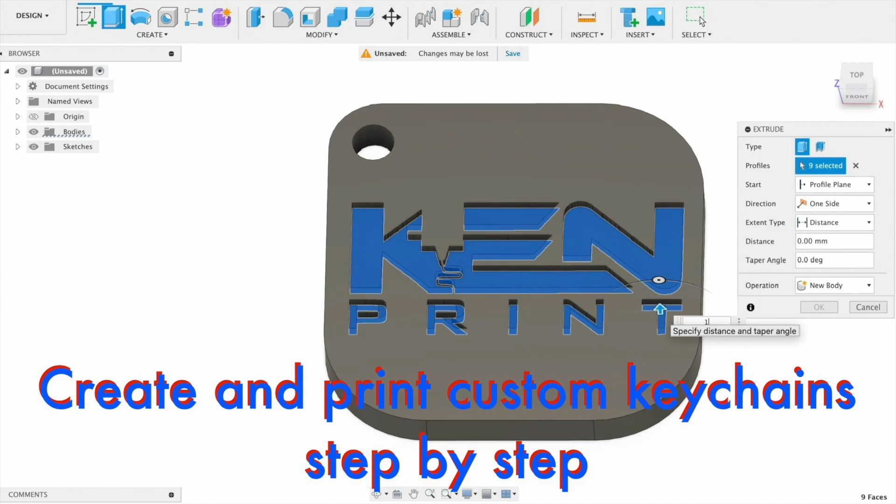Okay, so in today's video I want to show how to make a very basic keychain, and once we have our basic shape made, I'm going to show how to select an image, convert that image into an SVG file, and then import that SVG file into Fusion 360 and place it on our keychain to use it as a template to extrude.

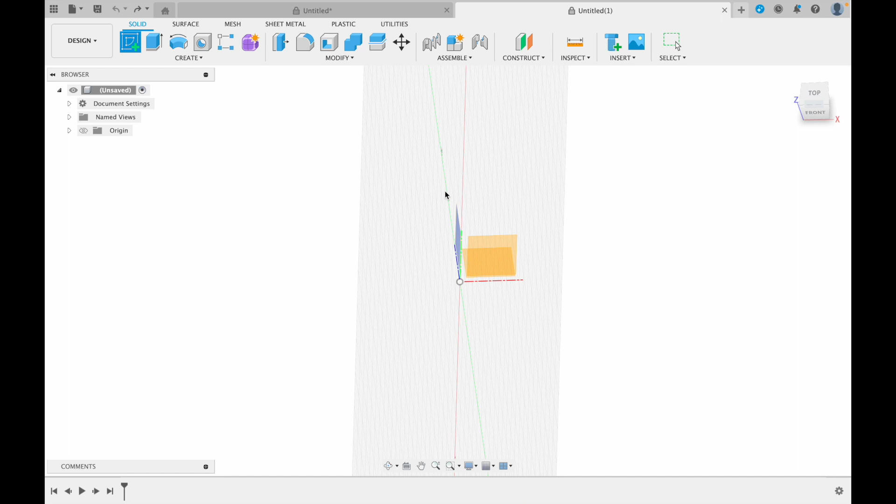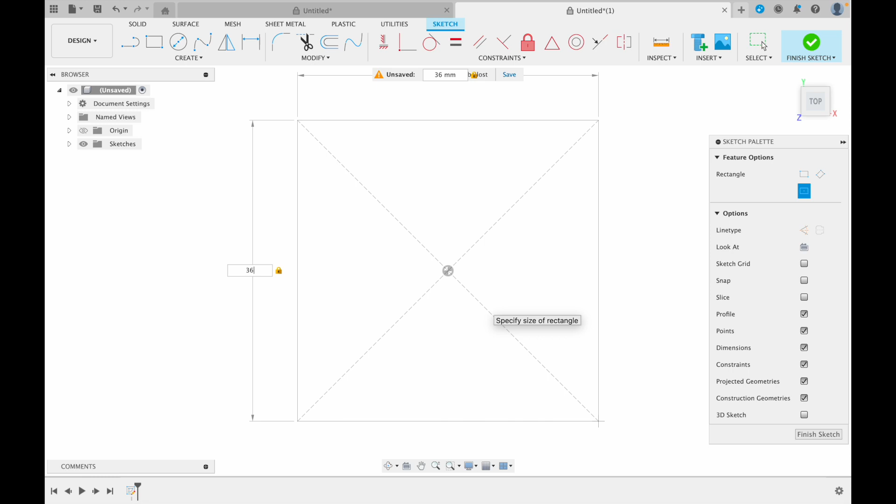So first we're going to go up here to create sketch, choose the top view to look down on it, select this plane, and we want to choose the rectangle tool. I like to choose the center rectangle. Select it, left click. Once we're on the origin point in the center, left click again, drag your mouse out and select the size you're going to go with. In my case I want to go with 36 by 36. Hit the tab key to move on to the next side. Click enter, and that's our basic square shape.

We want to go up here to the top to the fillet tool, select it and choose our corner to start with, which will be this upper left hand corner. I want to change this arc to being 5mm. This is the corner the keychain hole is going to go in.

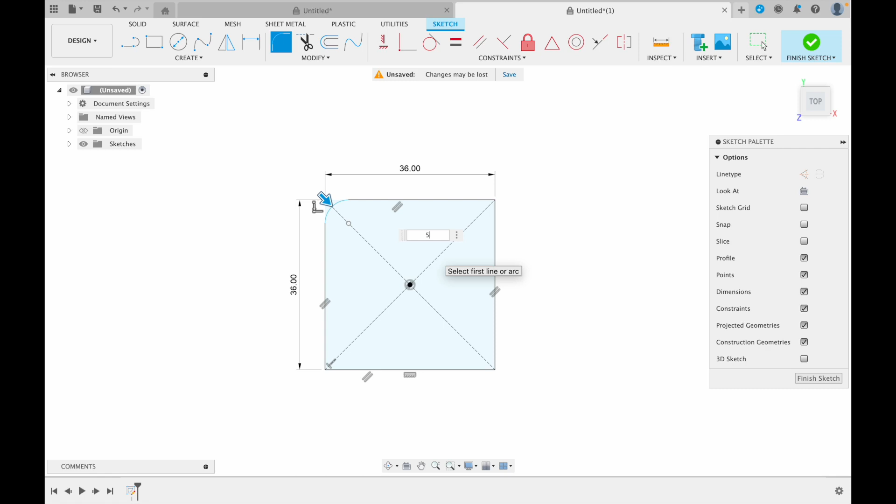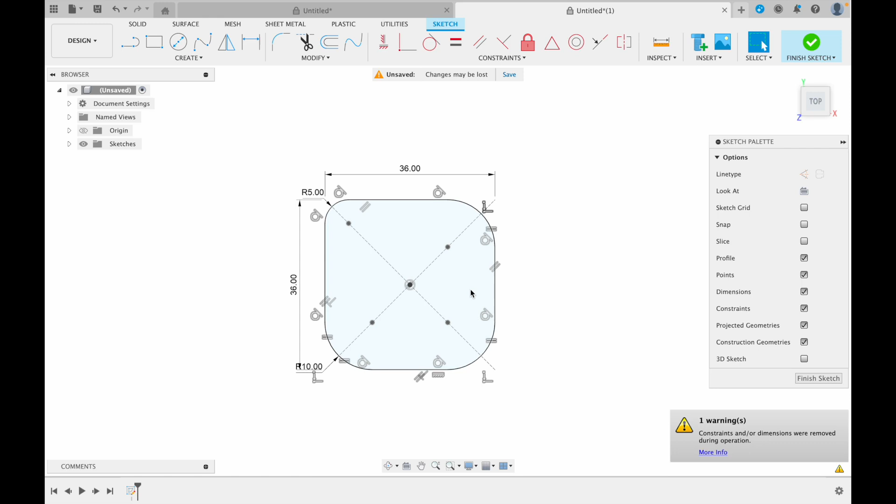Hit enter, select the fillet tool again, and we want to click on each of these other sides, and we want those to be 10mm. This is so that when the keychain is in your pocket, it has nice rounded corners. Select your shape, right click and extrude, and we want this to be 3.6mm thick. So that's our basic keychain shape.

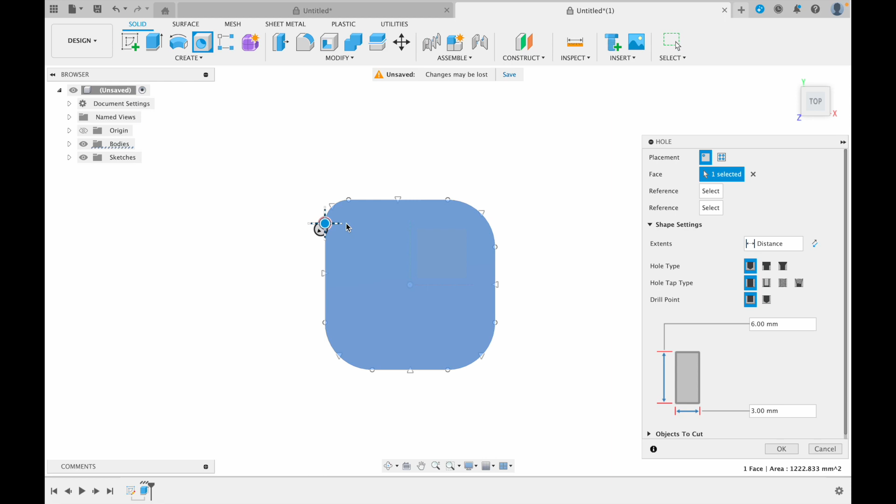We want now to add a hole to this top left hand corner, so click on the hole tool, click where you want it to be, catch it and drag it roughly where you want it. I have the size set to 3mm, but you can change that to whatever you want. You can make it a 4mm hole if you wanted. Once you're happy with the positioning, just click OK. And that's your basic blank keychain.

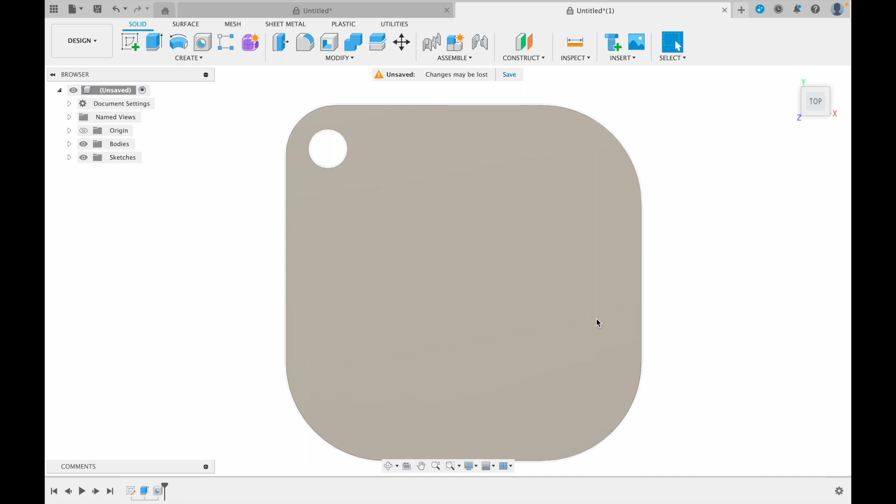So we want now to go and find our image and convert it to an SVG. So go to Safari or Google or whatever you use as a browser, and we want to type in SVG converter. I like to use this one here called onlineconvert.com. It's going to ask you to choose your file, so select choose file. I want to go with this image here, which is my Kenprint logo. Hit start and click here on the download button when that's done. You can minimize that, we don't need it.

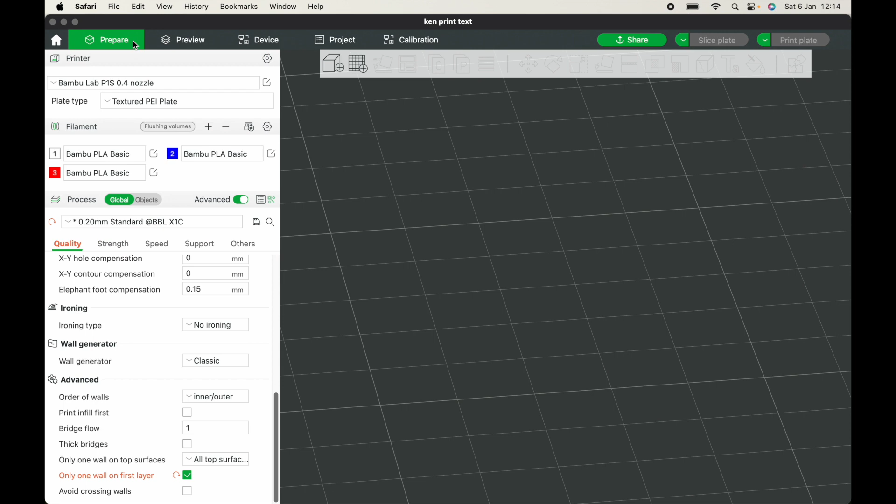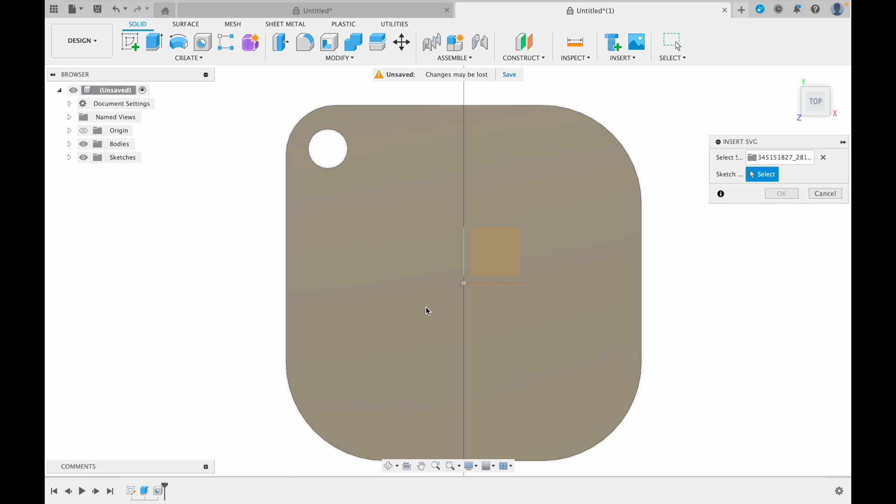Go back to Fusion. Up here to the top corner and click on insert. I want to go down to insert SVG. Insert from my computer, and you can see it here, it's the SVG logo. Left click it, click open. Select where you want it to be, so select this face, and it doesn't appear because it's actually a huge image. So if we zoom out a bit, you'll see it here on the left.

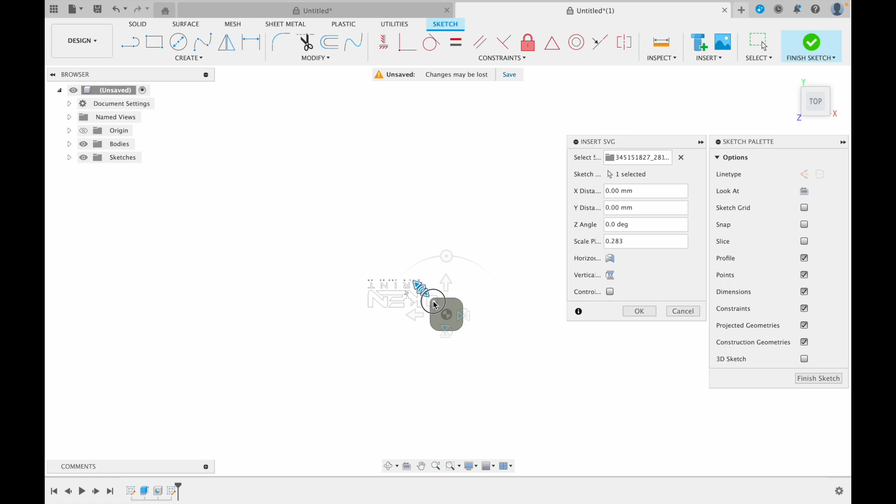So if you catch this little bar here just to the upper left hand corner of the square, you can see there's two arrows. Dragging in or dragging out increases or decreases the size. So we want to scale it down to a size that fits the keyring. This dot here on the circle, if we catch it, it allows us to rotate the image to suit.

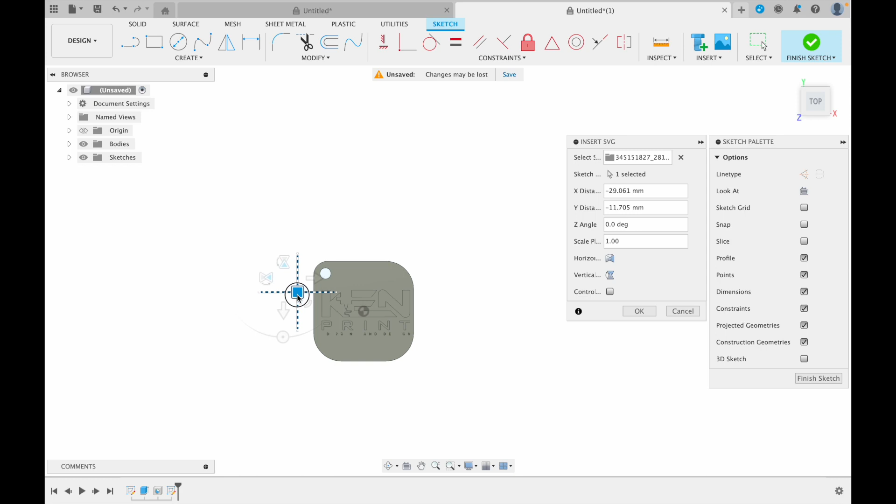This square here, by catching it and dragging it, you can move your logo to position it on the keyring. Once you're happy with the positioning, let it go and click OK. Now we have our image placed on our keychain. We now need to extrude this to make it a separate body so that it can be colored in Bambu Studio. So left click it, right click and hit extrude.

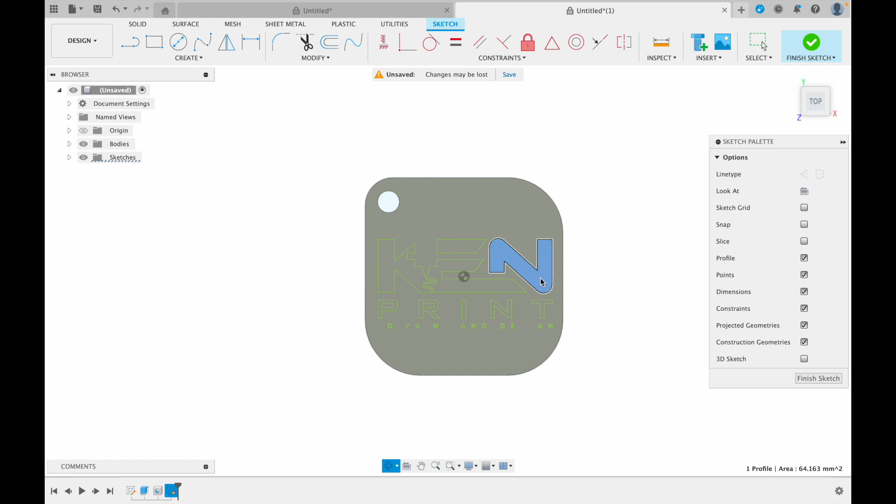Left click again, select each of the parts you want to extrude. As you can see, the letters are missing down the bottom here. Ignore that, I'm not using that part of the logo. I just want Kenprint on it.

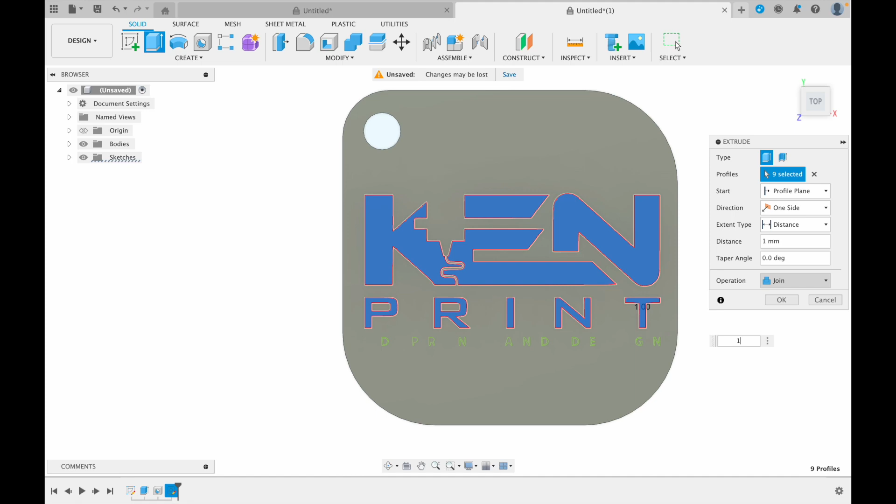So I want to go and cut this into the keyring by 1mm. So we're going to select -1. And you can see over here on the right hand side it has automatically moved to cut. If I had changed that to 1, it would have been in the positive direction and it would have stood up out of the keychain like this. So we want that to be -1, so it cuts.

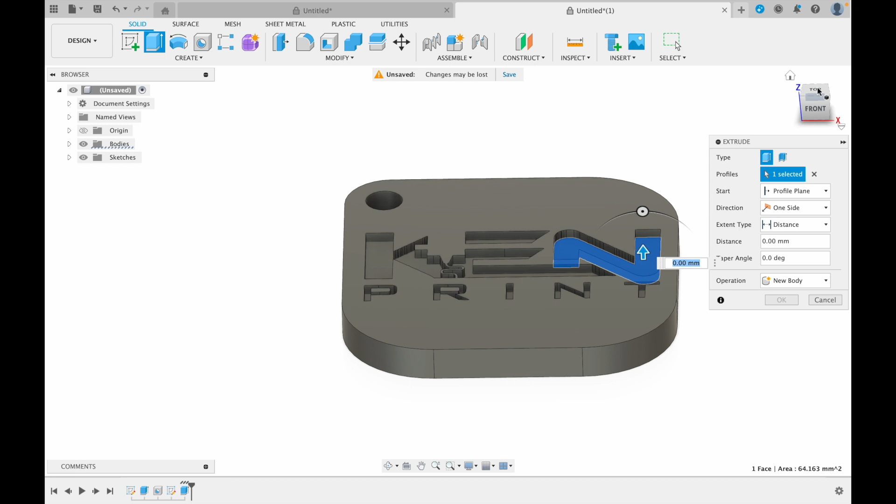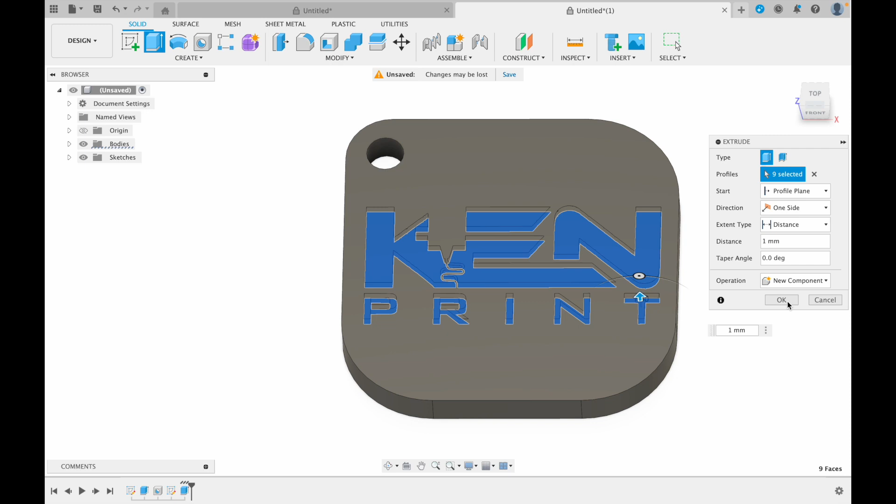But if we click here on join and move down to new component and click OK, we now have two separate pieces in the one keyring, so they can be turned on and off individually. So if I click on bodies, I can turn off the bodies, it leaves the text, turn off the text, etc. So I want to go and save this out as two separate parts.

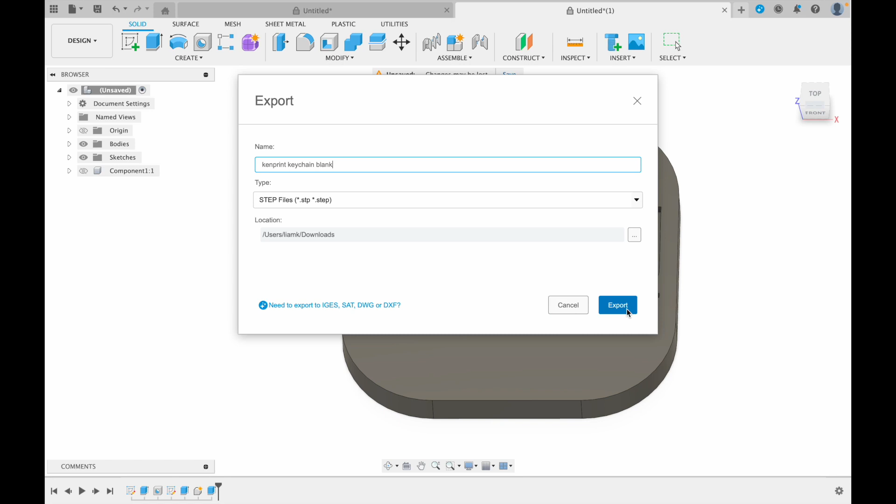So if I turn off the text first and export, click export, and I turn off the bodies and turn on the components for the text. I'm going to export the text now also. Kenprint keychain text, click export. Minimize that now because we're finished in Fusion for a second.

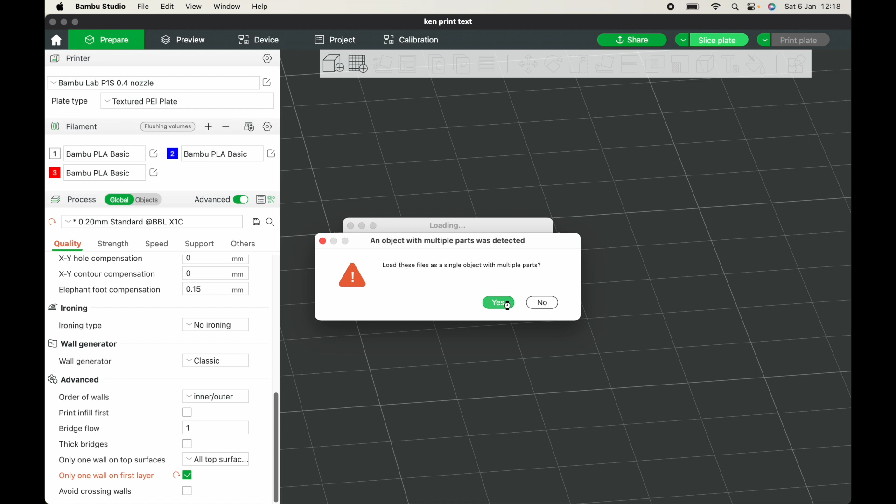I'm going to Bambu Studio and I want to click on add. I want to click on both of these, click open, and it's asking, do you want to load these as a single object with multiple parts, and in which case we do, so click yes. And you'll see it's facing up.

I want this to be a lovely smooth finish, so I'm going to print this upside down. So if we select this lay on face and choose the face you want it to lay on, which is this one, we now will need to do our colouring from the bottom.

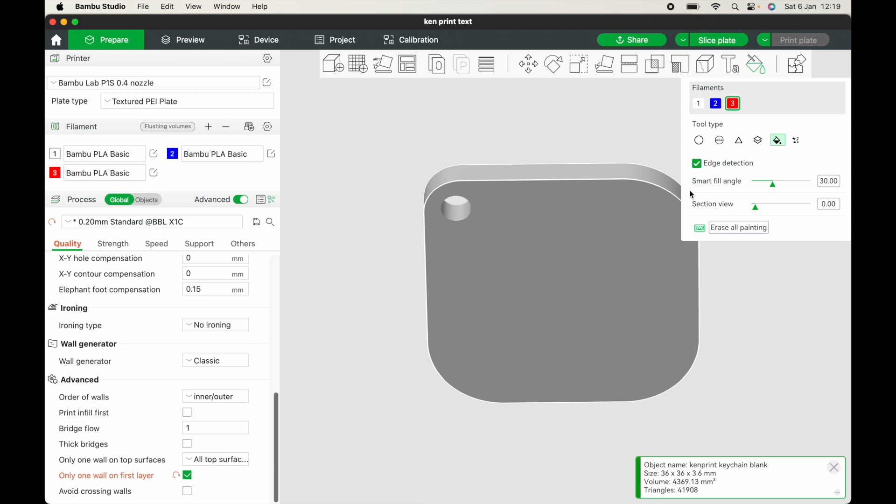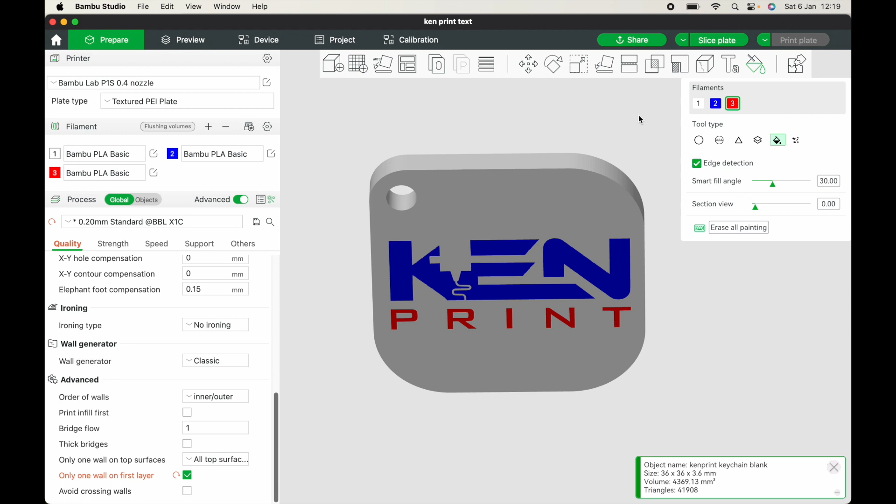So colour painting, I'm going to use the fill tool and I want to select blue for the Ken part. Click on each part and then select red. We're going to choose red for our print part. So you literally just click on it and it automatically colours it. And we're going to hit slice and see how that looks.

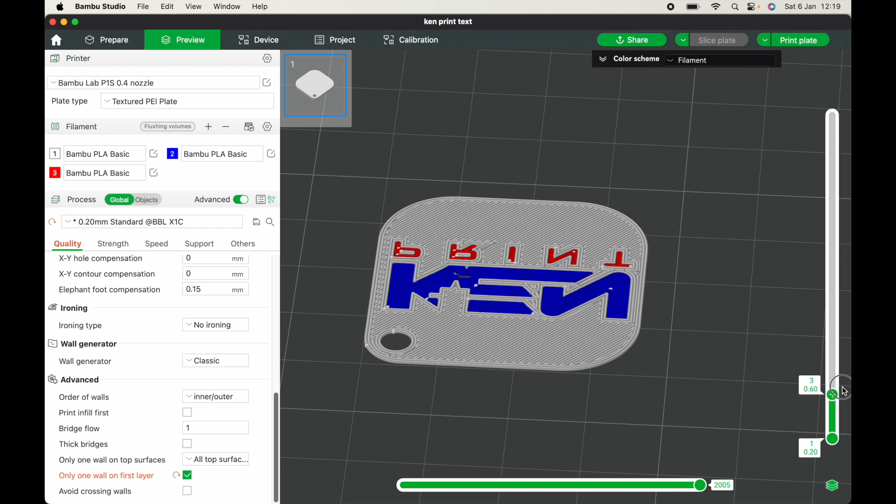Use the preview here on the right hand side to see the different layers, catch it and drag it down. So as you can see, it looks like it's going to print pretty decently. And it's giving us a total time of 29 minutes for that keyring with 8 filament changes, which isn't too bad.

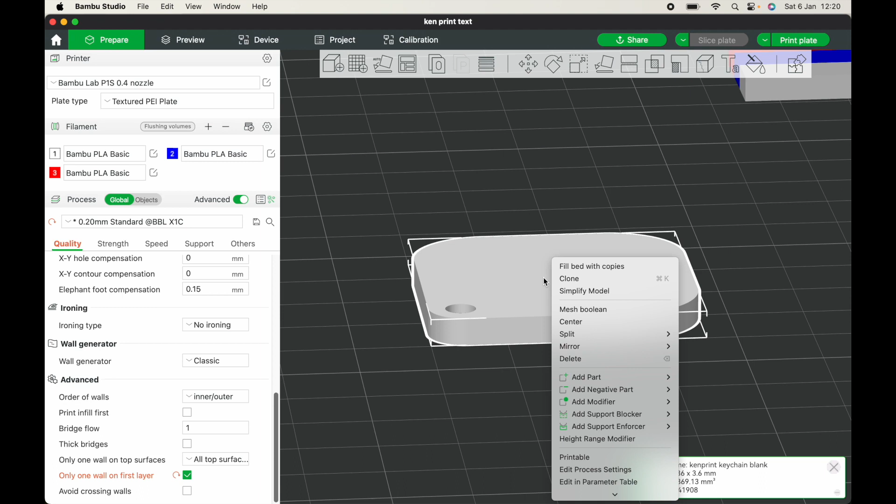So if we want to go back to prepare and make multiples of this, we click on it, then right click and hit clone. Choose how many you want. So let's go with 9, that'll give us a total of 10 on the build plate. If we right click the build plate and hit arrange, it'll sort them into an order that suits the printer. Hit slice again, and it's given us an hour and a half for a total of 10 keychains, which is pretty decent.

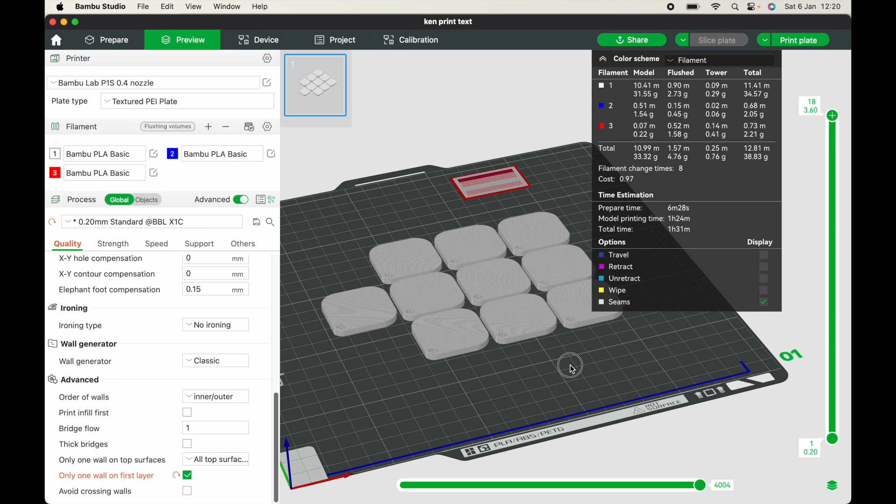So now all we need to do is hit print plate and send it to the printer once we have our different colors in our AMS on the Bambu printer. And we'd end up with 10 keychains. So that's the basics of how you do it.